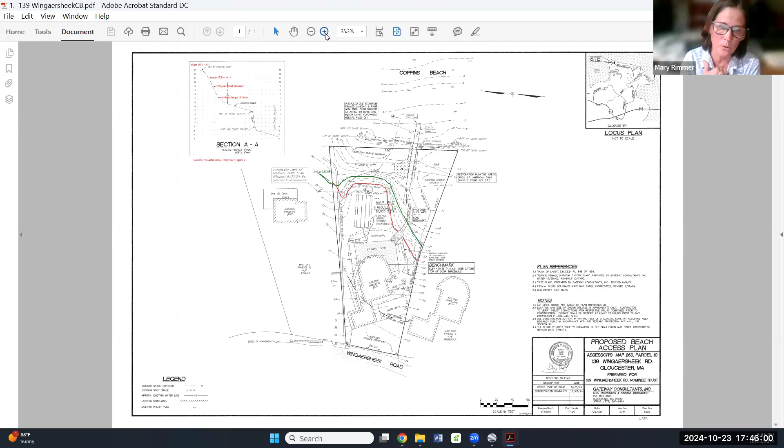This is kind of a situation where we have a rocky headland that is extending out towards the beach, and it transitions to a coastal dune. So there is an area where there's dune that is mostly sediment, wind and storm wave action blown sediment, sand that covers over a portion of the rocky headland.

But we tried to identify that area where it was mostly dune, and there's a transition area, but we identified the area that was primarily dune and has the ability to continue to function as dune and migrate, and the area that is locked in as bank. Some of that material was likely fill for the septic system that was installed there, but it's all lawn and it's no longer able to move. And there's not a windblown sediment that is on top of that area.

So with those changes, I think it doesn't really change the layout of our project. We're still 100% within coastal dune and land subject to coastal storm flowage. The bank is up higher on the slope, but this is for purposes of getting all the resources properly located on the plan and, for any future project that might happen on this, to just clarify where all those resources are.

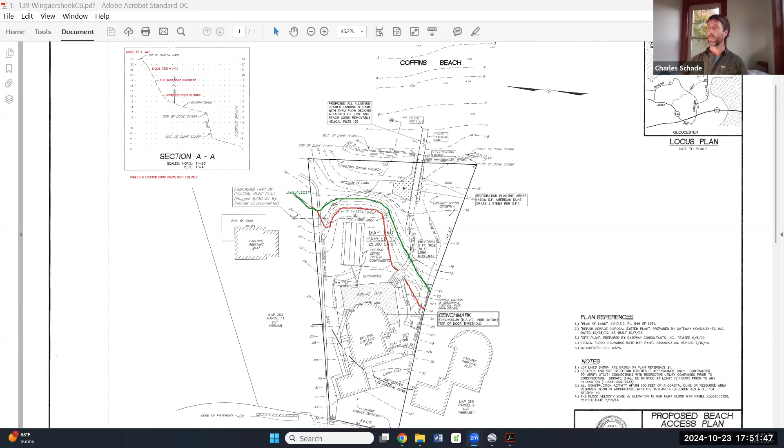I think that fill is going to act as dune and therefore should be delineated as dune up to the limit of land subject to coastal storm flowage. Currently they have it drawn further seaward, but again, I don't believe that grass is going to preclude that from acting as dune. I believe that dune line should be coincident with that green line for land subject to coastal storm flowage.

Okay. My only comment would be, obviously this is a complex site, a very complex site. My question to fellow commissioners would be, do we want to spend a little time, maybe one more meeting, to review, obviously with the applicant involved, the details of the notice of intent in terms of all of our requests and requirements? Do we want to scrub through all that?

Make sure we did the best we can to make this. Like you just said, we still have some open-ended issues here that are not so much technical, but I think we owe ourselves maybe a little bit more time to all review. You do basically a basic roundabout on the notice of intent and all the conditions and cycle it through all the commissions just for one more.

It's a very complex site, and I'm concerned about it like everybody else, I guess. So we usually do special notes, obviously, but I'm thinking we might want to go beyond that. I don't know. I'm just throwing it out there, commissioners.

One thing that some of the commissioners had brought up in previous meetings was restoring the grade of the dune through the existing pathway that's there now. That pathway is lower than the dune around it. And I think it was one of the comments from DEP as well that that dune form should be restored within the portion of the path there prior to putting Mobi-mat on top of it.

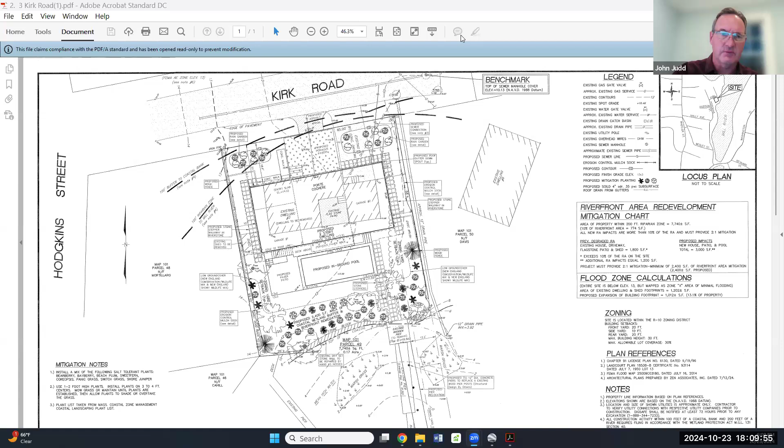The city has been notified of this, and I think the Cahills are absolutely correct. There's erosion happening during storm events. Greg is concerned about it as well. He doesn't want this erosion dumping across his property either. So I'm not sure what the solution is, but there's not much we can do because it's not on our property.

I'm just curious, what the neighbors said is happening, are they more impacted than Souza or not? I would say they're not as impacted as Greg Souza's property. He's directly the victim of this, and he would love to have that rectified, but it's not on his property. He actually asked me to come up with a solution and to make that another activity on this notice of intent. I said, there's not much we can do without it being on your property. This would be the Davis's application.

Okay. Chuck, is anyone else with their hand up? There are no other hands up at this time. Okay, seeing none, hearing none, close public comment period. I will go to Commissioner roll call comments, Chuck. Member Charpentier, no comments? Member Cook. I do have a question, kind of unrelated because it's not on the property, but who owns that catch basin and the drain? Is it city owned?

And what are we actually going to vote on tonight? So the vote is only going to be on the actual delineation tonight. They'll have to come back for the rest of the discussion after they receive relief from the zoning board.

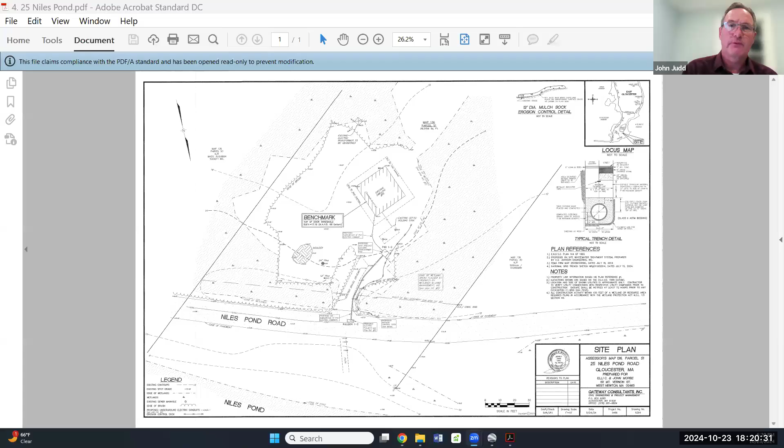Okay, so next up would be notice of intent. Do we have this DEP number? Yes, that one is 3024. So notice of intent 028-3024, 25 Niles Pond Road, Ellie and John Morris, installation of a new electrical service in buffer zone to bordering vegetated wetland. John Judd of Gateway Consultants Inc. representing. Thank you, Mr. Chairman, members of the commission. Once again, John Judd representing the applicant at 25 Niles Pond. You may recall we gave a description. We were just looking for the DEP file number for this subsurface relocation of the electric service on the property.

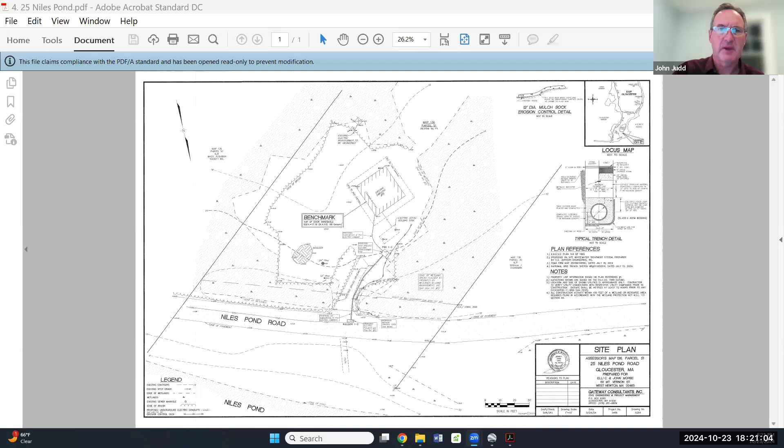So we're coming in off of a National Grid extension within Niles Pond Road. The existing transformer is behind the house in the wetland area, so we're going to be eliminating that. There were some questions about how that would be replaced, and I think it's in the record that we had no problem replicating that with the local wetland plants in that area, just to replace that existing pad, have that removed by hand, and so we saw no issue with that. We did get the file number as Chuck has indicated. Yep, 3024, got it. Okay.

Next up, I'll open up for public comment. Anybody in the public who wishes to speak for the project at 25 Niles Pond Road may do so by hitting the raise your hand button at the bottom of your screen or hitting *9 on your phone or handheld device. We currently have 13 attendees, and there are no hands up at this time. Okay, seeing none, hearing none, I'll close the public comment period.

Roll call commissioner comments. Member Charpentier, no comments. Member Cook, no additional comments. Member Sargent, yeah, all dewatering must be adequately treated before being discharged. Member Materi, no comments. Member Gullah, no comment. And Member Jackson, no comment. Okay, can we move forward?

Yep. Commissioner Jackson moves to close the public hearing for NOI 0283024 at 25 Niles Pond Road. Charpentier seconds. Roll call: Member Charpentier, yes. Member Cook, yes. Member Sargent, yes. Member Materi, yes. Member Gullah, yes. Member Jackson.

Yes. Commissioner Jackson moves to approve NOI 0283024 at 25 Niles Pond Road with previously discussed conditions as documented, including the treatment of any dewatering. Charpentier seconds. Roll call: Member Charpentier, yes. Member Cook, yes. Member Sargent, yes. Member Materi, yes. Member Gullah, yes. Member Jackson, yes.

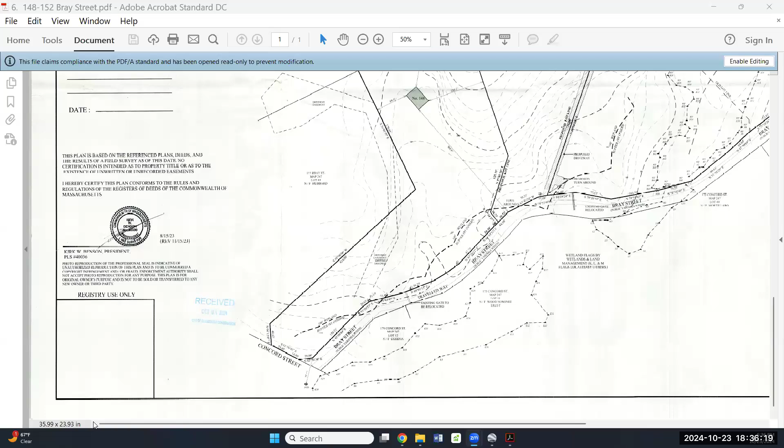Chris McCarthy, 166 Bray Street in Gloucester. I filed an RDA after meeting with the fire chief and the DPW director for the city of Gloucester, getting an approval and restricting 12 acres to 2 lots. The fire chief wanted some improvements that I'm going to have to work in conjunction with the DPW director to improve a gravel road and keep it

as a gravel road, a crushed stone, move a municipal gate that was installed down about just over 400 feet, close to where there's a pipe of water that crosses over Bray Street, and really widen within the public roadway itself the ability for emergency apparatus to get down, really keep basically the same grade. In some places we might need to raise or lower it, but install basically processed gravel. Wondering if you might have some questions. Thank you.

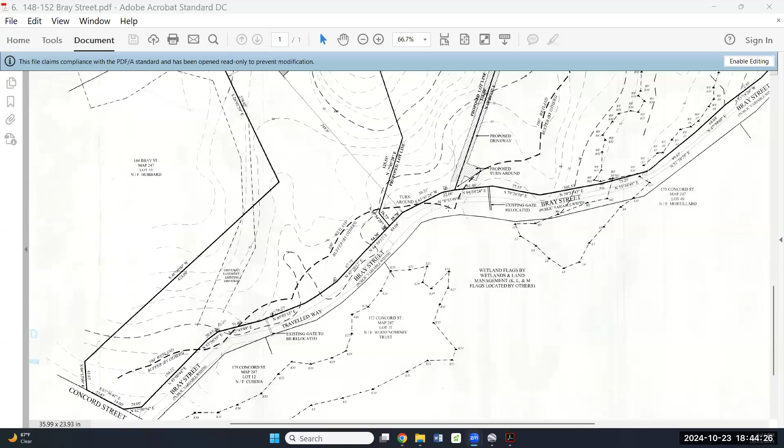You want to do roll call commissioner comments, Chuck? One other thing is I plan on putting the siltation fence along the entire east side. I might not have put that clear on the plan, but that's going to be the entire length. And also as it goes down towards the construction close to the gate at the east end, I'll have the siltation fence going across Bray Street temporarily while that construction is going on.

Okay, you all set? Can we move on, Chris? Oh, sure. Yeah. Ms. Page's hand was up again. I don't know if we're going to allow her to speak again or the commissioner comment. As long as it's related to conservation. You can hear me? It will. Hello? Thank you, Chris. I appreciate the clarification on the gate, and you understand it's a formal process, so I feel I do have to weigh in. Thank you. Yep.

Okay, roll call commissioner comments, Chuck? Member Charpentier, no comments. Member Cook, no comments. Member Sargent. Yeah, I note that the fire department required some ledge removal and removal of overhanging trees, which creates 2 questions. I'm wondering if there's going to be any blasting and how much, and what kind of vegetation will need to be removed within buffer zones. And all dewatering must be adequately treated before being discharged. I would just, with regard... Hold on, commissioner comments only right now, Chris. Oh, I'm sorry.

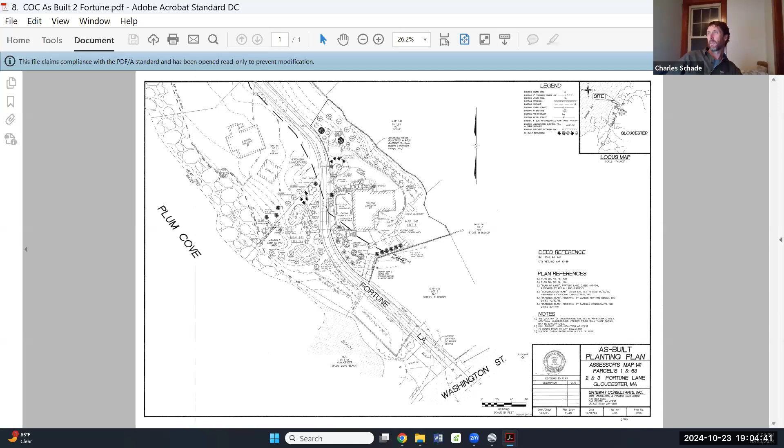So that's the hedge line right there, and this area here is the area of the hydrangeas that were proposed. About 20 feet of hydrangea bush that was proposed. Yes, right in there. And the group of plants here, plantings that would be closer to the resource area, that just were not right there. Right. Can we see the photos?

Chuck, do you want me to pull up that email, or do you have that? Yeah, if you have them ready. Yeah, I can pull it up. Just got to go into my shared screen here. But I want to see specifically that area if we could. All right, let me see if I have that. Okay.

All right, so this is what was sent over to Chuck today. Okay, sorry about the delay. So that's the existing hedge that comes along the left side of the driveway as you go up, and it's pretty well stabilized there. And then it drops down toward Plum Cove Beach. And that was the area.

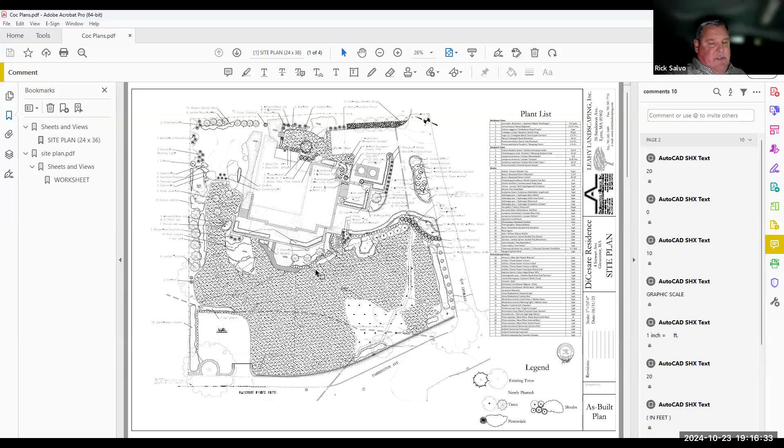The dwelling was rehabbed, and there was a significant amount of landscaping that was involved. Obviously, given the proximity to the resource areas, we had to make a filing with the Conservation Commission. If I scroll, this was the proposed plan that was approved by the commission. Just to point out the differences of what got built versus what got permitted.

The driveway up in the northern part of the site here off of Stewart Avenue was called out to be a seashell driveway. That driveway was installed a little bit bigger, as I'll show you on the as-built. It was also paved instead of installed as a seashell driveway. That driveway is completely curbed, and I'll show you in some photos in a minute. That flow is not tributary to the wetland resource area. It goes out to a stone area along the edge of Stewart Ave, ultimately into the Stewart Ave drainage system.

There was also an outbuilding that was approved in this area over here, which had its own separate driveway. That building did not get built, and it is not going to be built. So there's quite a bit of impervious area over here that was directly tributary to the BVW that was not built. And the site called for about 8 trees to be planted. This owner planted about 51 trees, 400 or 500 shrubs and grasses. They really went way above and beyond with a very good native landscape installation.

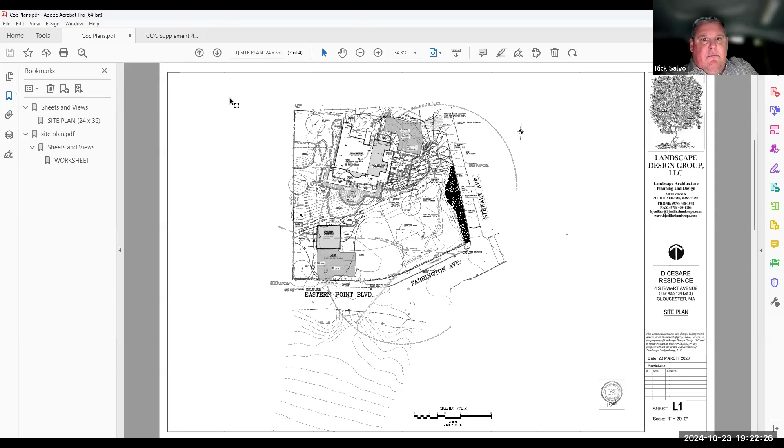But that area is not going to catch all the water from that upper driveway too. I mean, it's not infiltrating into that stone area. It's running off into Stewart Avenue and then down to the catch basin. On Stewart Avenue, that's correct. And then those catch basins basically dump the water out onto the beach across the street. Correct. So originally, if that water was to infiltrate, it would have gone down into the wetland before it would cross under.

All right. Sorry, wait. Commissioner comments? Where were we on comments? He was responding to somebody's, and sir, we're going to go through all the comments and then you can respond to them all at once. I think, was that you, Member Cook? Did I ask about that? Yep, I'm done. Okay, Member Sargent?

Yeah, I'm concerned about the increased runoff with no treatment going to a public bathing beach. I'm also concerned about the process. If you're making this much change, there should have been an amendment or something. It's like it's better to ask forgiveness than permission. It just doesn't sit right with me. Thank you. Member Materi? Yeah, I echo that last concern.

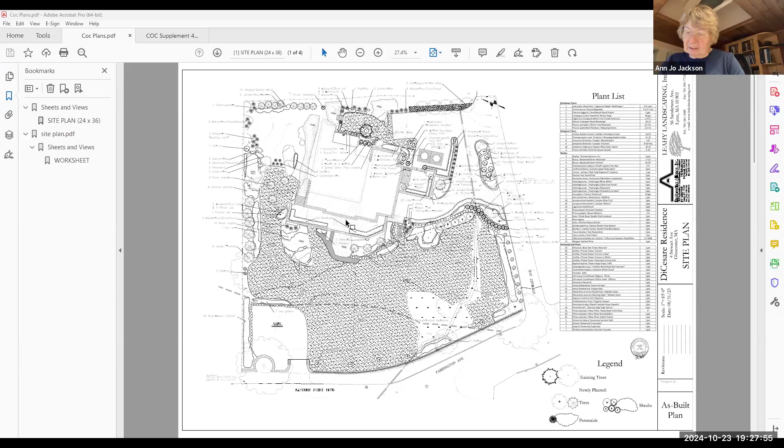Okay, do you think you can have those ready for November 6th? I can. Okay. Commissioner Jackson moves, so I guess we don't need to continue this. We'll just see you November 6th. Right. Okay, thank you very much. All right. Are there any other comments from the commissioners? Peter, were you going to say something else? No. Okay, thank you.

Okay, you're welcome. All right, we'll see you November 6th, sir. Great. Thank you very much. Thank you. Bye. Bye-bye. Okay.

Rob, you back yet? All right. Has somebody from Farrington showed up yet? Yes, looks like Mr. Bornhoff is back and has his hand up, so let me promote him. Okay. Rob, you want to do Farrington? Yeah, for the record, Rob Bellows rejoined the commission. As soon as I can find Farrington in my notes, I'll bring it up. Hold on. All right. We do have 3025 as the DEP number, correct, Chuck?

Yes. Okay, next up is notice of intent 028, DEP number 3025, 29 Farrington Avenue, aka 12 Brace Cove, Eric Bornhoff, for construction of an elevated boardwalk in bordering vegetated wetland and coastal dune. Eric Bornhoff representing.

Can you hear us, Eric? Hello, Eric. Hello, Eric. You are definitely unmuted at this time, but we can't hear you. Can you hear us? Oh boy. Technical difficulties. Hello? You're not muted, so you should be able to hear us. Okay. I don't know what to do.